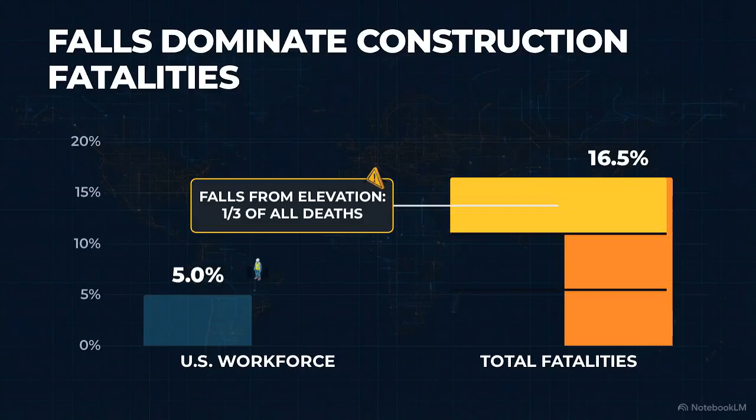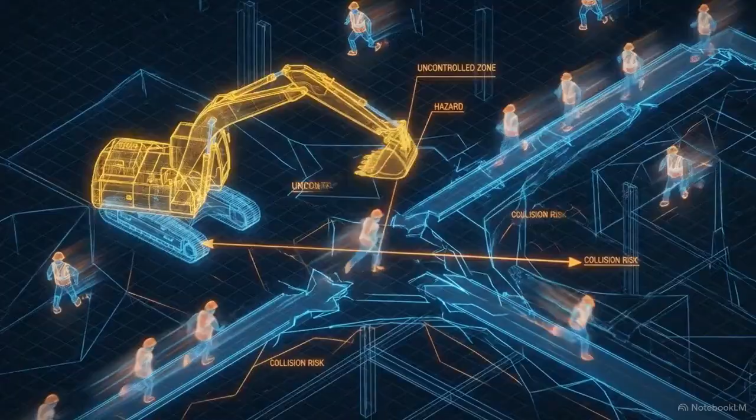Compare a job site to a manufacturing plant. A factory floor is a highly controlled environment with fixed machinery and one management structure. A construction site is constantly shifting. You have overlapping phases, dozens of subcontractors, and heavy machinery navigating temporary terrain.

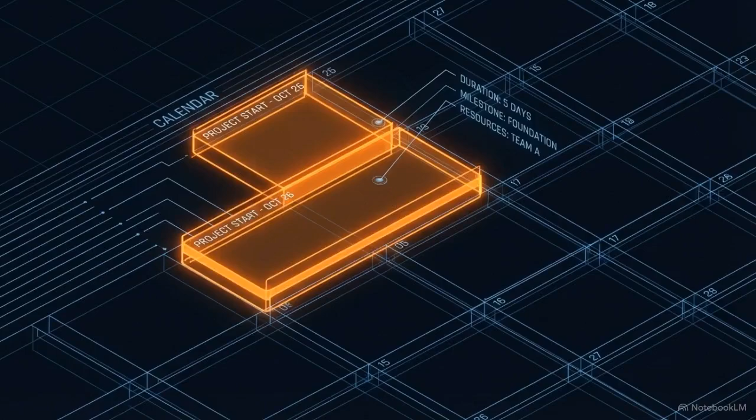Industry experts point out that major accidents rarely happen because of one massive error on a Tuesday afternoon. Instead, they stem from small, quiet coordination gaps during the early site setup. Managing hazards on the fly simply does not work. To survive an OSHA inspection, and more importantly, to keep people alive, safety has to be engineered into the site on day zero. OSHA is the Occupational Safety and Health Administration, the federal agency that enforces workplace safety laws.

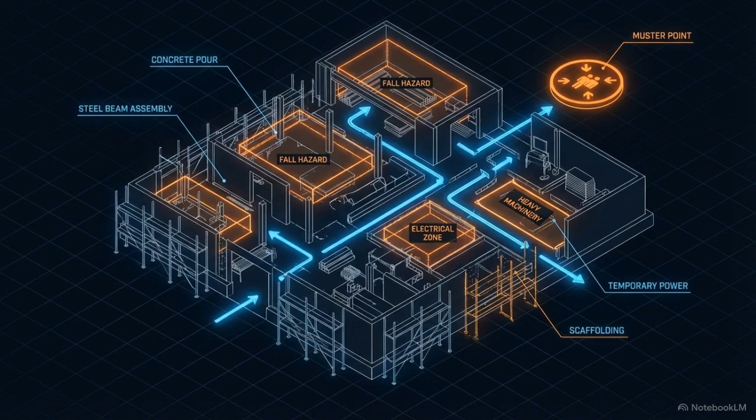Day zero mobilization is where actual safety begins. It is the logistical planning and site setup that happens long before the first shovel hits the dirt. Through targeted safety consulting, teams map out a site-specific hazard assessment to predict and control risks before workers arrive. They also establish a strict emergency response plan. This maps out exact evacuation routes, incident reporting procedures, and designated muster points for immediate roll calls.

Then there is the legal side. General contractors bear primary legal responsibility under OSHA's multi-employer worksite policy. Requiring signed safety agreements and orientation training ensures subcontractors are accountable for their own crews. Proactive site setup takes the fragmented chaos of managing multiple vendors and replaces it with a single, highly controlled operational foundation.

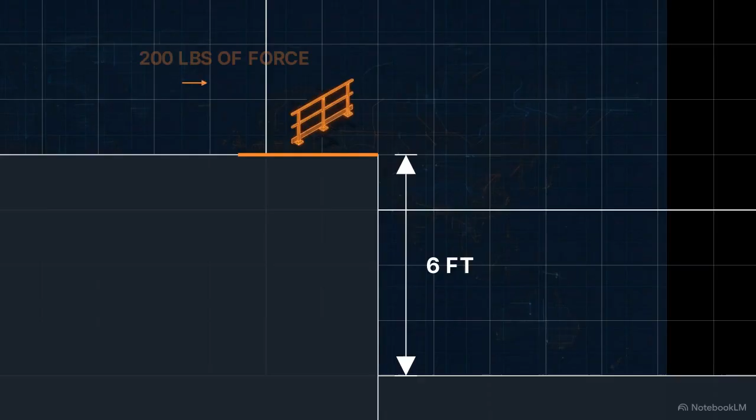Let's look at the physical engineering controls deployed to neutralize that massive threat of fall hazards. The baseline is the OSHA 6-foot rule. Any worker near an unprotected edge 6 feet or higher must be protected. Protection means guardrails, safety nets, or personal fall arrest systems. And those guardrails have an exact physical tolerance. They must withstand exactly 200 pounds of outward or downward force applied to the top edge without failing.

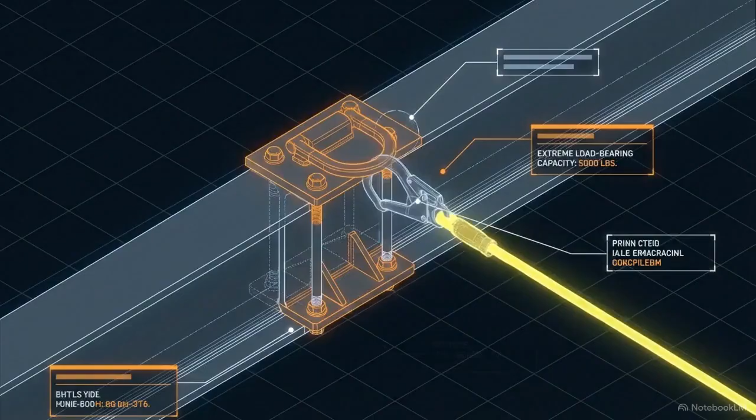If there is a hole in the floor, the cover over it must be capable of supporting at least twice the anticipated weight of employees, equipment, and materials that might cross it. For personal fall arrest systems, the anchorages have to be completely independent from platforms. They must also be capable of supporting a massive 5,000 pounds per attached employee. These OSHA standards are precise mathematical thresholds engineered to absorb catastrophic kinetic energy and keep bodies from hitting the ground.

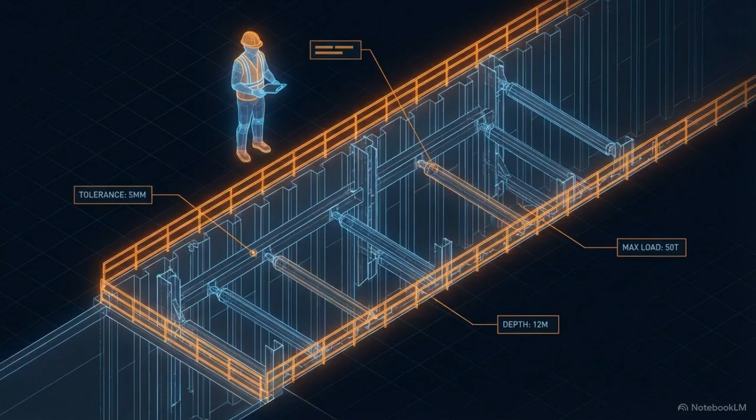Of course, an engineered site still relies on the human operators working inside it. This requires a strict hierarchy of training. That means a comprehensive OSHA 30-hour certification course for supervisors and an OSHA 10-hour training course for all general workers. Certain high-risk operations, like trenching, scaffolding, and confined space entry, require a competent person. A competent person is a specifically designated worker authorized by the employer to identify hazards and take immediate corrective action to eliminate them.

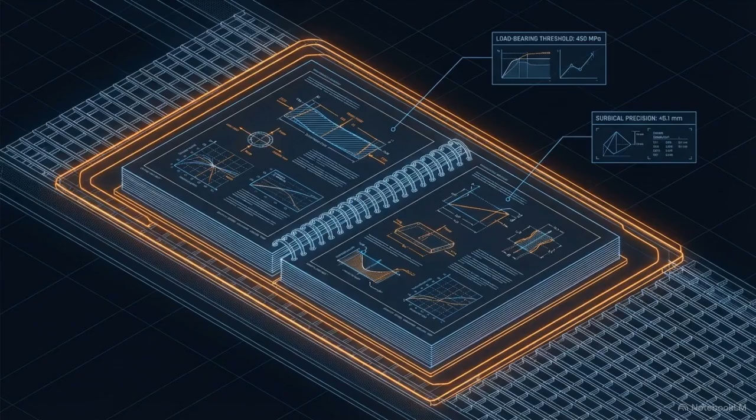Then there is the baseline personal protective equipment, or PPE: ANSI-approved hard hats, Z87.1 safety glasses, Class 2 high-visibility vests, and ASTM safety toe boots. These standards are published by organizations with strict technical requirements for industrial materials. Even the most perfectly engineered environmental controls will fail if the crews aren't properly armored and educated to interact with them.

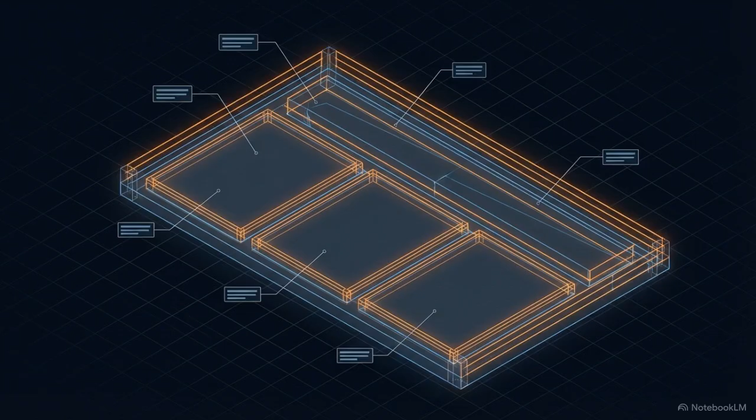When you stack the logistical planning, the physical engineering controls, and the human training together, you get a fully operational safety system. The business outcomes of the structure are measurable. Sites with these programs consistently show lower lost time injury rates, far fewer workers' compensation claims, and reduced insurance premiums. Compare this meticulously engineered environment with the inherent chaos of the unmanaged site we looked at earlier. The difference is clear.

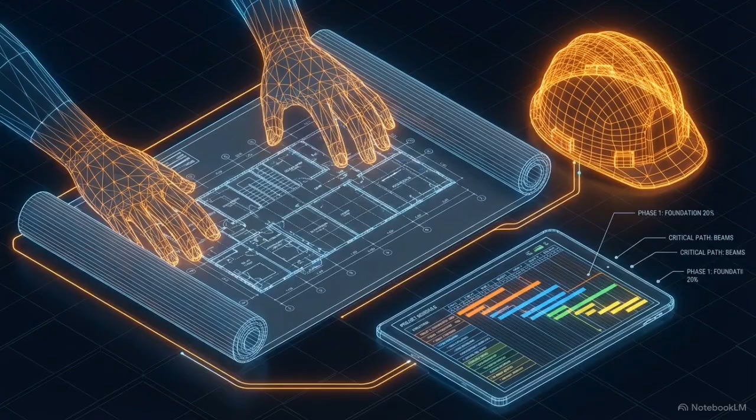Integrating rigorous safety protocols into early mobilization does not slow a project down. It provides the essential discipline, clarity, and foundation required to execute the work successfully and to ensure every single worker goes home alive.